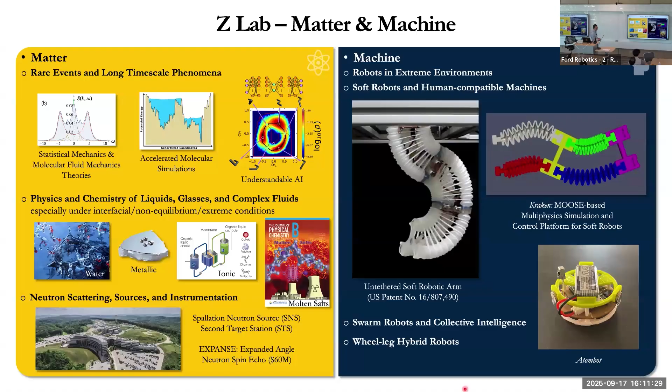So there are a lot of applications for robots in the nuclear field. Let me talk about how we got into robotics first, and then I'll look back to nuclear applications. Robotics itself is not a new concept; we have known robots for more than several tens of years, maybe hundreds of years.

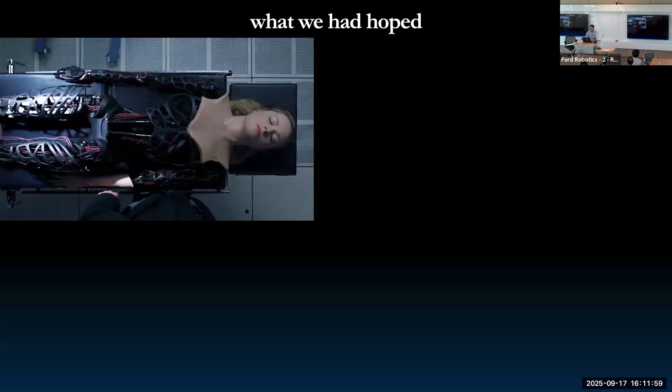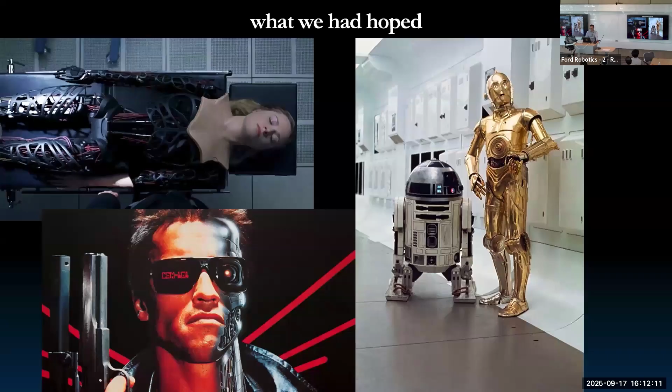At the beginning, what we had hoped for were general purpose androids, sometimes even more human than us, and maybe some crazy robot that tries to kill us, and sometimes an obedient robot that can always help us do different things, and lastly, maybe a cute, harmless buddy. But we've been spending so much effort on robots, and we don't have any of these.

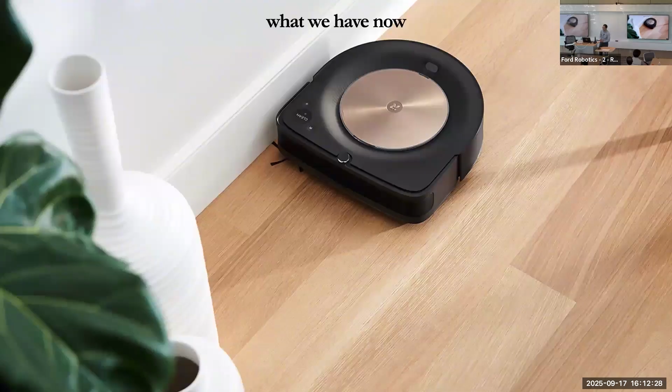The most useful everyday robot we have is probably this, right? So there's still a lot of work to be done before we can have the robots as we dream about. And that's why we still have a lot of people working on robots.

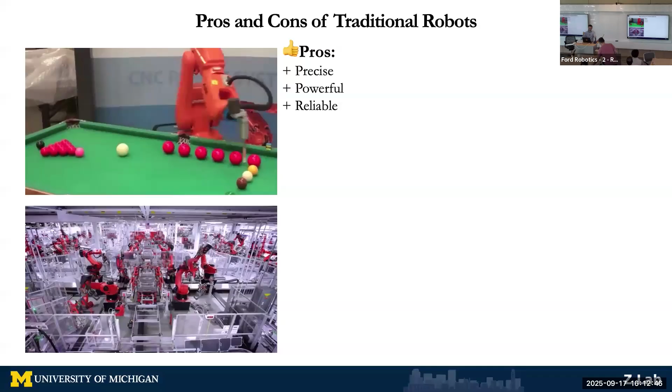If you reflect a little bit on the pros and cons of traditional robots, roughly summarized here: traditional robots are very precise, very powerful, reliable, and they don't complain, right? So, ideal student.

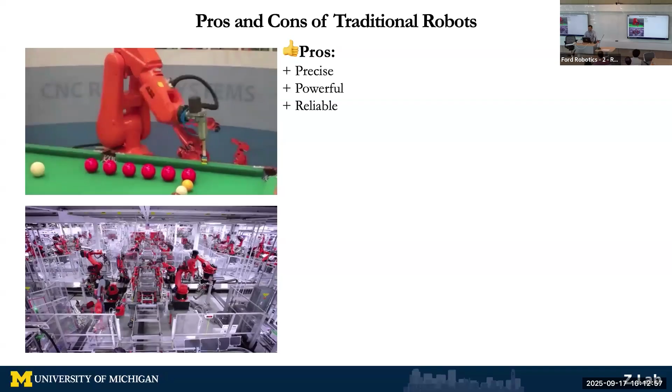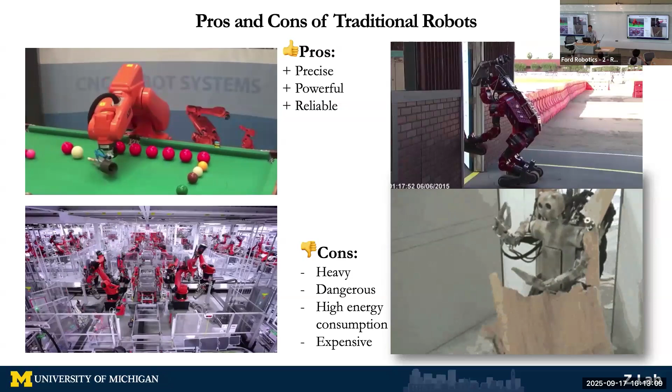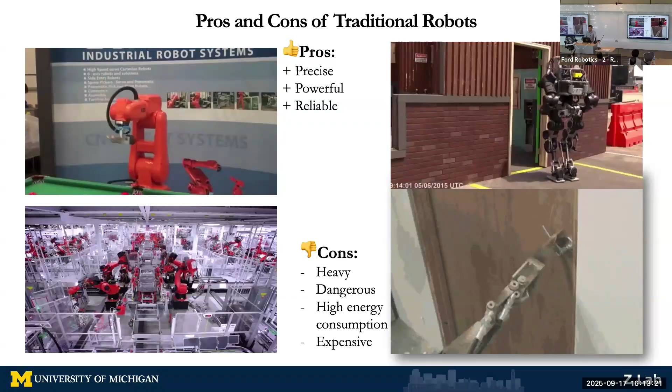But on the other hand, traditional robots also have a lot of problems. They are usually made of metal, very heavy, and they consume a lot of energy, and they're very expensive. In addition, when they fail, they fail catastrophically. That's why oftentimes we don't see robots around us, and more powerful robots are kept in cages, so they're not human compatible.

One of the goals -- I started working on robots again roughly 5-6 years ago, after I got tenure. After getting tenure I wanted to work on something different. And the one goal we had was we wanted to free these robots from the cages.

At that time, soft robots were a really, really hot topic. There was a lot of development in soft robots, the community was forming, with a lot of cool ideas. Soft robots became a mature field, a mature community roughly about 10 years ago. So we started to work on soft robots, trying to explore different new soft materials in our lab.

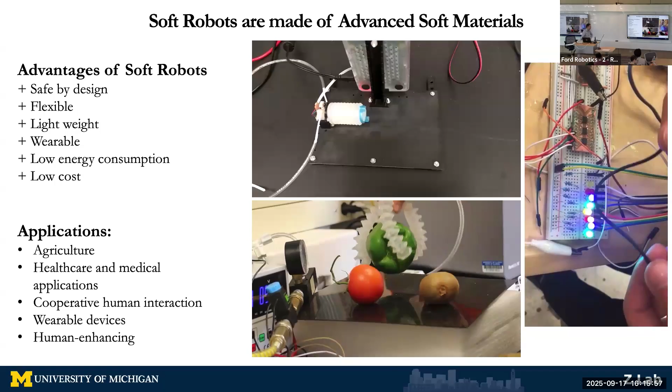So we spent some time on that, and in the nuclear field, we're trying to think about: can we bring soft robots to nuclear applications? Are there any unique use cases?

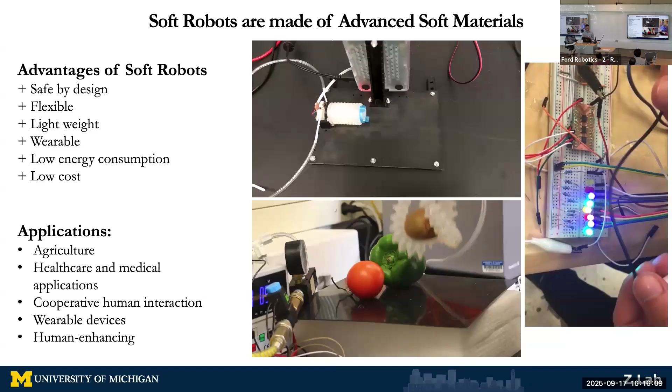So this is one of the early prototypes we built, starting from one actuator. We built multiple of them, then modularized the design into 3 sections that can be controlled separately. You can see the 3 modules already achieving degrees of freedom impossible for traditional robots.

So this looks very similar to a lot of the ongoing work in the field. By the way, this is the real-time movie. I think our robots move pretty fast.

The particular innovation we did is—it's not like we wanted this from the beginning. We wanted to find tiny valves that could open and close the air tube, but we couldn't find anything as small as we needed. So we use a soft tube. There are a lot of other slides, but I'm not going to show them today.

Our idea is that it's kind of like our blood line—if you pinch a soft tube, you can regulate the flow. So we use a micromagnet that drives a small pin, changing the pressure on the soft tube, which allows us to regulate the airflow. We can also completely close the valve, and the response time is in the millisecond time scale, allowing us to move really fast.

We filed the patent a few years ago, and it's already approved. Because our airflows are regulated locally, compared to other soft robots, ours do not need that many tubes. Otherwise, for every valve you'd need 2 tubes—1 input, 1 outlet. For us, even for the entire robot, we only have 1 tube. This way, the robot itself can be made more flexible, and we can also extend that even longer.

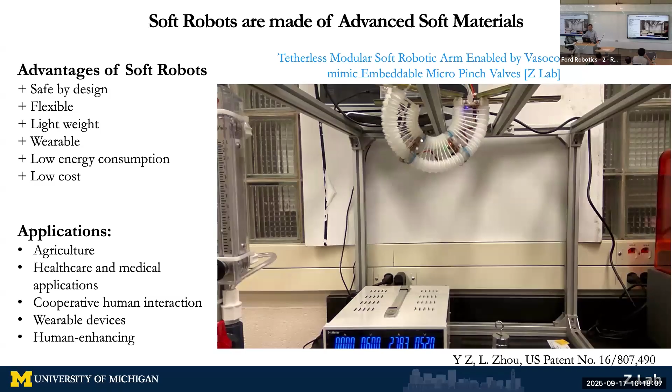Okay, I'm going to pause here slightly and change the topic to nuclear. So what is the hard problem we must solve? There are many hard problems nowadays we're facing, and this is a hard problem—not one we want to solve, but one we must solve. What I mean by that is energy.

This is a chart that shows global energy consumption as a function of time, separated into different categories. For a very long time, before 1900, humans really did not consume much energy. This really takes off from roughly 1900 to 1950. After 1950, because of the advancement of modern technology, human energy consumption really took off, and even more so in the last few years.

If you look at the different types of energy sources, we're still burning some traditional biomass. A lot of it comes from fossil fuels—coal, oil, natural gas. And there is more and more development in new energy sources, nuclear being one of them.

So in short, there's going to be more and more demand in terms of energy. The question is, how do we solve that? Well, we can keep increasing the mining of coal, oil, and natural gas—probably they're going to continue.

Of course, they are not perfect, not only because of environmental pollution, but even worse, they are very valuable resources. If we burn them, we cannot regenerate them for a very long time. We don't want our future generation, 100 years later, finding new uses for oil and saying 'our idiot ancestors burned all of them.' So even though we can keep using them, it's better if we can find alternative energy sources. Nuclear is one of them.

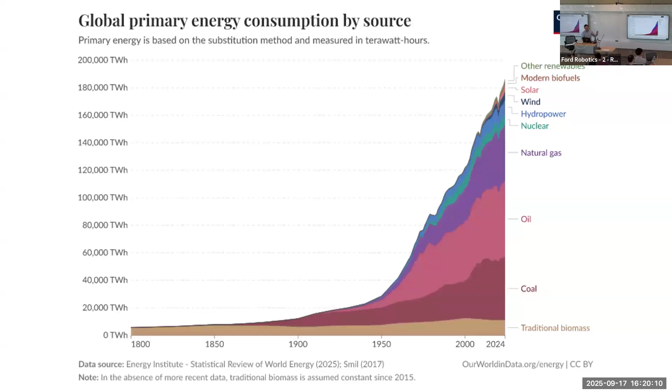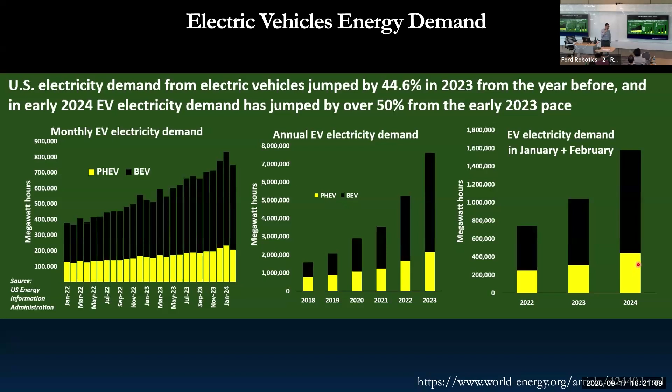If you look by month, in 2024 this paper doesn't have the data, but they compare the demand for the first 2 months of 2022 and 2023, and it's still growing faster and faster. If you look at the comparison of EV energy demands, now it's a big piece of the big pie.

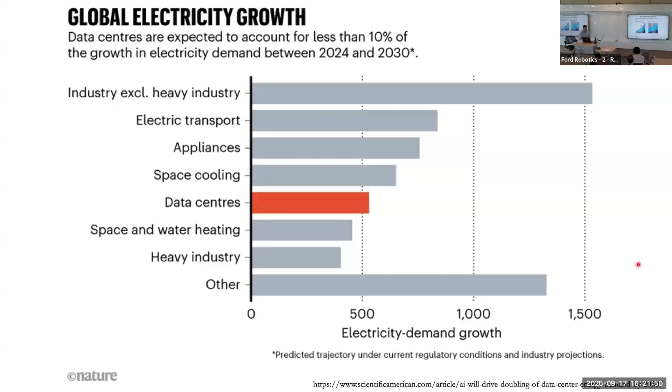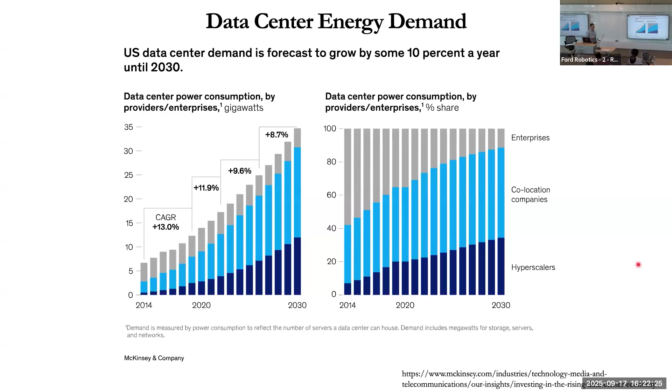So where does that energy come from? We still need to produce electricity to power what data centers need. That's why all of a sudden, a lot of billionaires, venture capitalists and high-tech companies start to put in a ton of money in terms of nuclear energy.

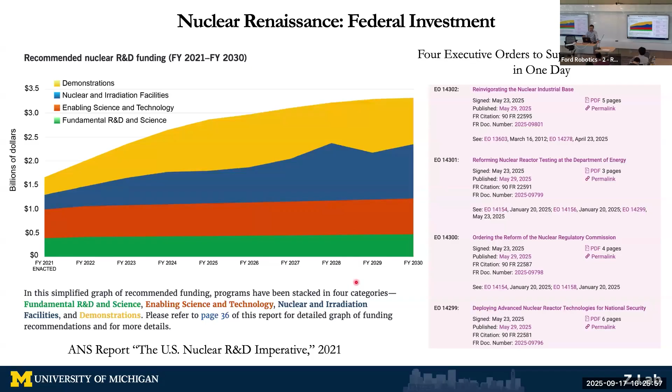So this is the big problem we're trying to solve. Now, coming back, what role can robotics play in this nuclear renaissance? In the past, we have been building soft robots, and I'm going to show you some use cases of soft robots in nuclear environments.

When we started to work on soft robots, they're not like traditional robots. You really have to make a 3D model, build a robot, then collect the data and test them. There's not a lot, almost none, of simulation and control environment. So we started working on that.

The first work we did is related to modeling and simulating soft robots. You can use some analytical models, like Cosserat rod or curvature models. They are very efficient for computing, but have very limited expressivity, usually assuming the robot is one-dimensional. Overall, it's very helpful to understand the motion of the robot, but they lack the details to compare with real robots. A more realistic method is to use finite element analysis.

Finite element is accurate, and you can also incorporate not only the deformation of materials, but also all the other physics—bring heat transfer, bring fluid mechanics. So there are multi-physics, but the problem with finite element is they are very expensive. You have to spend a lot of CPU power to do the calculation.

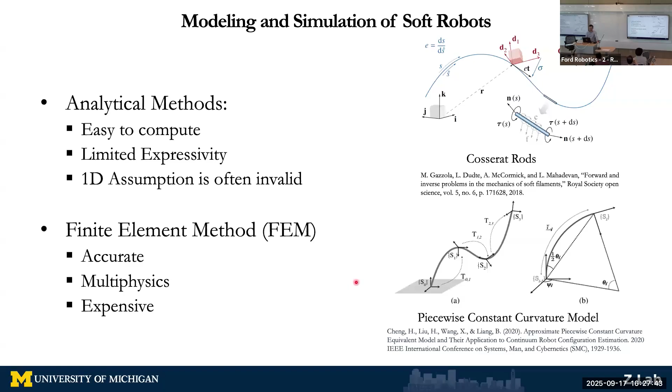So one research direction of my former student, Kevin, was to develop simulation environment software for soft robots. So we created a simulation environment we called Kraken, built upon a MOOSE framework.

For those in the nuclear field, you may have heard of MOOSE. It's a large-scale finite element framework, provided by many different components of packages supported by DOE, the Department of Energy. Originally, MOOSE was created to simulate nuclear reactor fuel performance, etc.

On top of the MOOSE framework, you can build apps. It's open source, and by design supports multi-physics, providing high accuracy modeling. But it's not designed to simulate soft robots.

So we took the MOOSE framework and built an app on top of it, which we call Kraken. In particular, we added three features.

MOOSE, from the nuclear field, does not usually have hyperelastic materials. So first, we added a capability to simulate hyperelastic materials. Then we added the capability to simulate the dynamics or kinetics of the soft material. And lastly, we had to deal with self-contact—without self-contact, the soft actuator wouldn't bend. So these are the three features we implemented.

I'll go through them quickly. The first one is hyperelastic modeling. Usually there are a couple of other simulation frameworks for robotics in the field, but most of them treat the material as linear, so they don't really directly have hyperelastic materials.

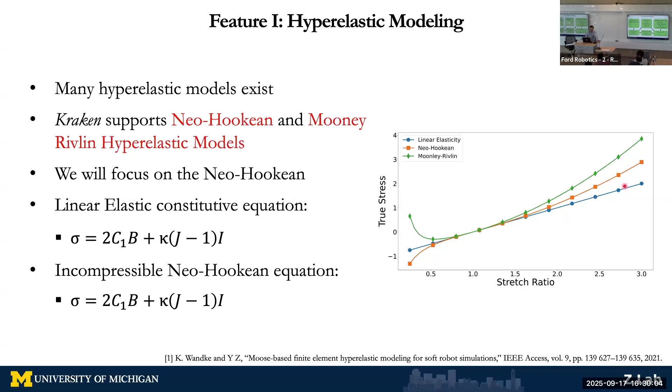That's only correct when you don't have large deformation. In a linear regime, the linear approximation is good, but when you go to very large deformation, we have to use the hyperelastic model. This shows the stress-strain curve of these soft materials—linear elasticity is here, but the actual deformation follows either the green or the orange curve, for different materials. So we implemented this hyperelastic material simulation in the framework.

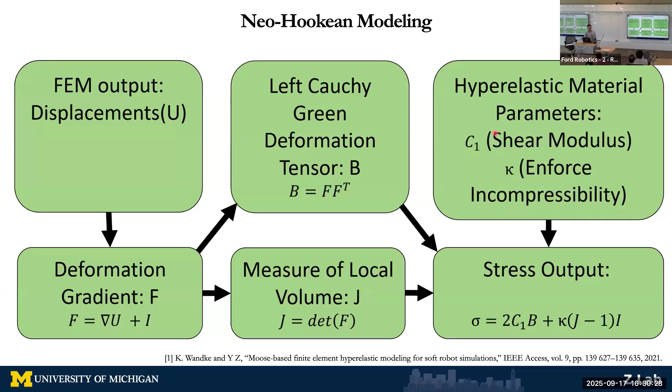Here are more details on how we do that. In order to calculate the stress-strain curve, we first deform the material and calculate the deformation. From there, we can compute two quantities: one is the so-called left Cauchy-Green deformation tensor, the second is the local volume. Based on these two, and also some material properties, we can calculate the true stress of the material.

This is some demonstration of our simulation. We start by stretching a rod, a hyperelastic rod. If you only stretch it a little bit, it's elastic. If you keep stretching, the hyperelasticity starts to show up.

In this figure, we show two lines on this curve. One of them is our simulated Neo-Hookean model, the other is the theoretical stress, and they agree with each other. For linear elasticity, you can only go to about 100% deformation.

Then we built an actuator, a very simple one that everyone uses. We built the actuator, and we can also stress it and get a stress-strain curve, and this has a somewhat good result compared to the experimental method.

So we built the actuator and inferred the material property. By the end of the day, you can see the smoother curve is our calculation, and this rougher one is the experiment. So we can model this hyperelasticity in the soft robot.

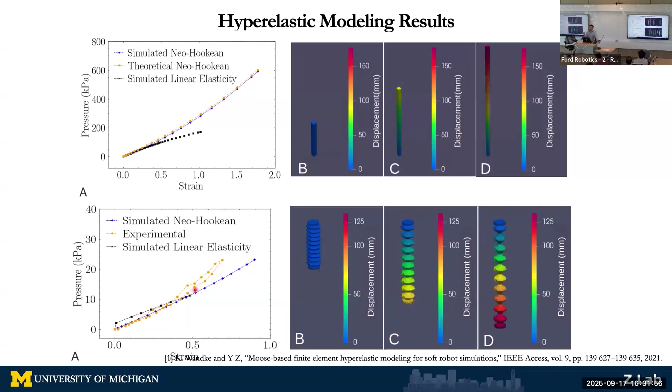The second problem we faced is that because the soft robot itself is soft, oftentimes when you move the robot, it's not very stable—it's often underactuated, oscillating. So only being able to simulate or understand the quasi-static configuration is not enough. We need to be able to simulate the dynamics of the soft robot.

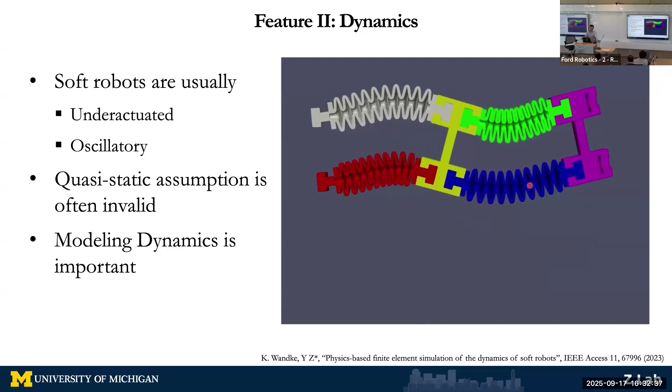So within our environment, Kraken, we added the capability to model the dynamics. This is a demonstration to show that we can simulate the deformations of a two-dimensional robot arm. Later on we have a real one, but this helps us both control the robot and iterate the design process.

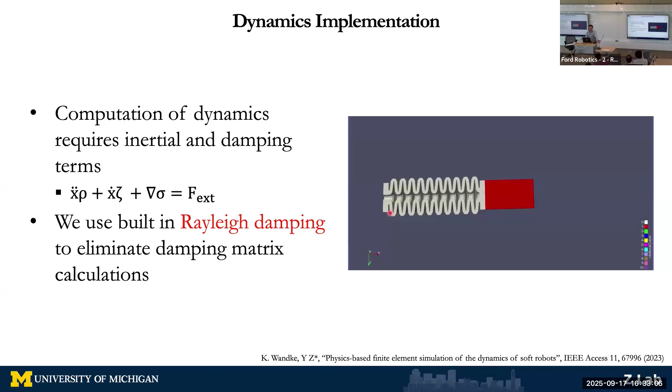This is another demonstration to compute the dynamics. The time scale is not linear, that's why it's not very smooth—we accelerate the simulation so we don't need to sample unnecessary time steps. In this comparison, we show that we can model the Rayleigh damping of a hyperelastic actuator.

Sometimes we really want to push to the extreme to see if we can simulate more complicated motions. So we took one actuator, again a very simple one, with hyperelastic deformation, and we put a weight at the bottom.

Even with this, the system itself is nonlinear. This hyperelastic pendulum can swing, and at the same time the actuator can also expand and contract. So there's a lot more computation involved, and this is a complex system. We really cannot have exact predictions for a long time, but for a short time, that's pretty good.

The left-hand side shows the actual measurement of the locations of this actuator. The right-hand side shows the simulation. The actual trajectory itself is irrelevant. What's important to look at is the spectrum—the prediction of our simulation matches the experiment pretty well.

So this opens a way to not only simulate the static configuration of a soft robot, but also the dynamics. It's very important for soft robots.

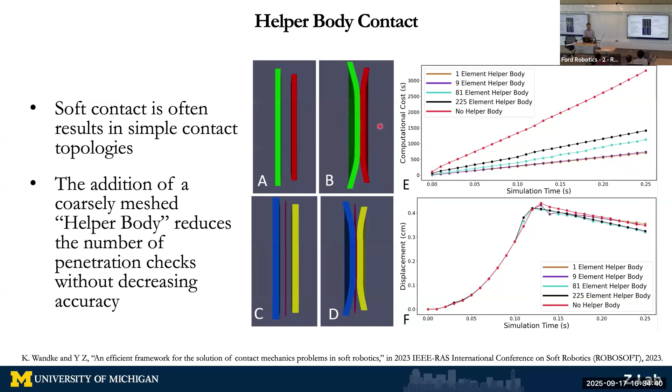The third feature we had to implement in order to simulate soft robots is contact. A soft robot can move because of contact. The original Moose framework does not have soft contact, and computing contact mechanics is usually very expensive. So we found a smarter way: we add a helper body to separate the two different components, which helps speed up the calculations of soft contact mechanics.

So now we're able to simulate all of this on the computer, which can help us with both the design and the control of the robot.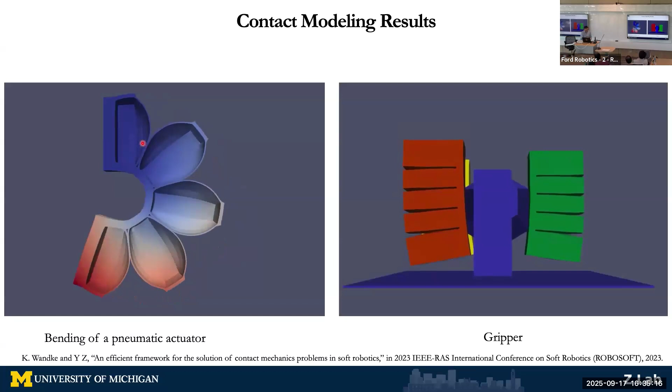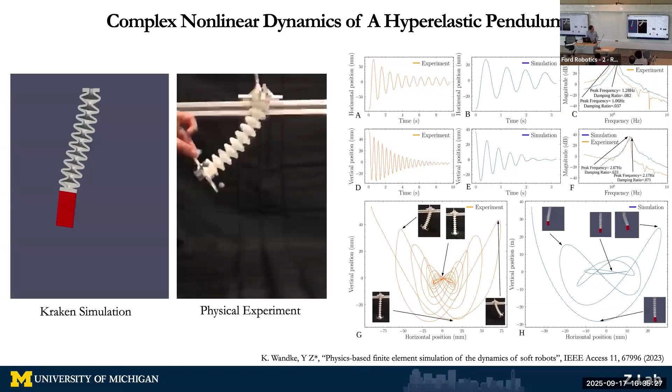Undoubtedly, when we published this work, we were contacted by a company. So let me explain why I have a simulation like this—what is the shape? This company makes prosthetics, artificial hips. They reached out to us because one of the major costs of their product is actually making the package.

You have to package the hip in a form, so they wanted to know if we deform the hip, try to make it flat, can we predict what its shape looks like. It's a pretty simple calculation for us—we did it for them. This is the artificial hip.

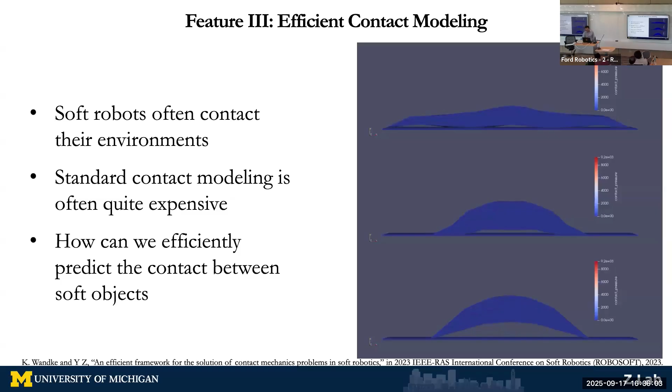So in short, this part of the work was really done by one of my students, Kevin Wandke. I did the three components of this framework—we have a simulation package called Kraken. This allows us to simulate hyperelastic material deformation, the dynamics, and also some efficient soft contact.

With this, we can really help speed up the manufacture of soft robots.

Now I'm trying to connect this. You see the in-air version of the soft robot arm—it moves pretty fast, but it wobbles. One challenge for soft robots is that they have to handle the weight of themselves. The only pure soft animals in the world are underwater, like the octopus.

So we decided to redesign our soft robot arm and put it underwater. This is also because of nuclear reactors—we have a reactor pool, and we need a robot arm that can resist radiation and also operate underwater.

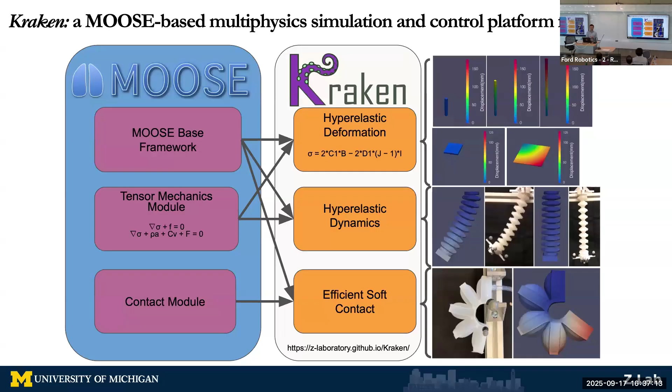So we did it—this shows it doing some crazy movements. We haven't seen that yet on the video. The size of the arm is basically the size of my arm, not extended—a brief idea similar to our previous design.

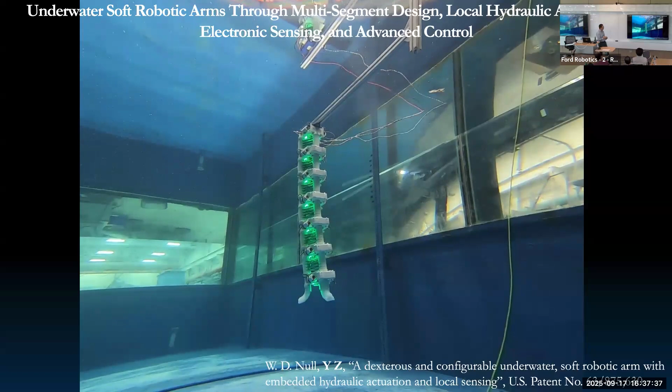In this case, we're in the underwater environment. If you watch carefully, you might be able to see water flows.

With the multi-physics simulation package, we can simulate the deformation even underwater. We can simulate fluid mechanics within the actuator as well as deformation of the hyperelastic material.

And I have an accelerated version—acceleration—you can see the flexibility we can achieve in an underwater environment.

So again, we filed another patent. Another benefit of a soft robot like that, especially underwater, is we can tune the density of the robot to be very close to the density of water, so they are neutrally buoyant. We don't have to worry about the weight of the robot itself.

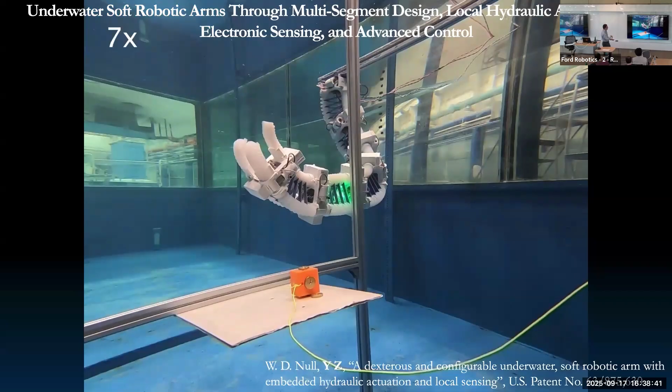And being flexible, you can use the robot arm to go around obstacles to grab things. So we put a pillar in front of the robot, but because of the flexibility of the robot, we can use it to grab something behind the obstacle. This is oftentimes very much needed in a nuclear reactor pool.

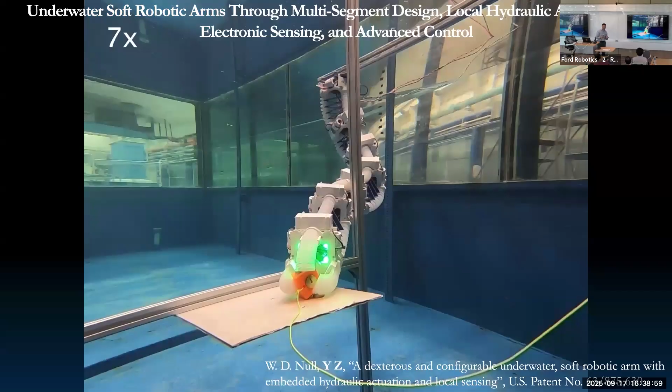So although you might think that you really do not want to drop anything in the reactor pool, in reality, a lot of them get dropped in the nuclear reactor pool. And it's very, very expensive to remove them.

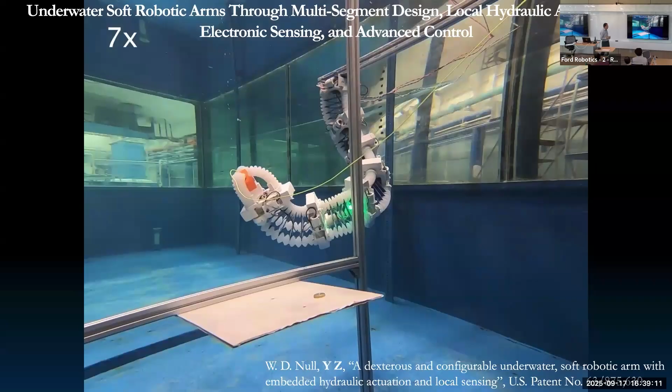For our soft robots, because we pump water from the environment, nothing is 100% radiation resistant. Everything will fail eventually. But our robots are somewhat more radiation resistant than traditional robots because we make them from soft material. Soft material becomes harder and harder under radiation. Eventually, they are going to fail, but when they fail, we replace them. This can be modular. Every section is cheap and replaceable. So this is the benefit of having soft robots instead of traditional robots.

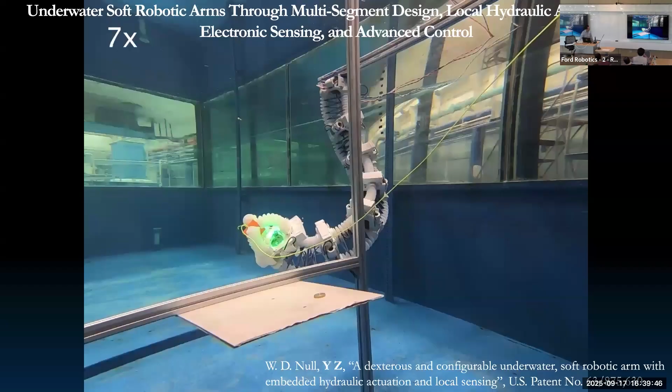There are a lot more applications in this environment. So if this seems familiar, you might have seen that in Spider-Man, right? The design of the robot arm is very similar to Dr. Octopus. I watched the movie a long time ago, and I feel like no real person can carry those metal arms. So what we are trying to do in our group is build a soft Dr. Octopus.

Interestingly, do you still remember why Dr. Octopus created those arms in the first place? Nuclear, right? Dr. Oct needs to achieve nuclear fusion, so he needs these arms to put in deuterium and tritium together to ignite the fusion process. So yeah, Dr. Oct is indeed a nuclear scientist who created the robot.

There's a lot more behind the scenes which I'm not going to be able to show. But in this video, we show trajectories of the robot as it tries to reach a few different targets using different controllers, as shown in our paper. The robot itself is very challenging. The open-loop inverse kinematics, visual servo, CQL, and TRPO controllers are benchmarks, and the auto MPC controller is shown in comparison to them. The panel on the bottom left shows real-time details of the experiment, such as time outside the goal region and current distance between the end effector and the target.

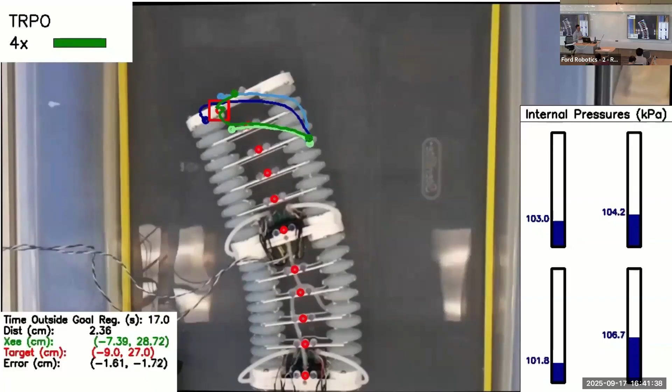The panel on the bottom right shows pressure readings in each of the corresponding hydraulic actuators. In each of the selected experiments, the auto MPC controller is shown to outperform the benchmarks in terms of final distance to target and time outside the goal region.

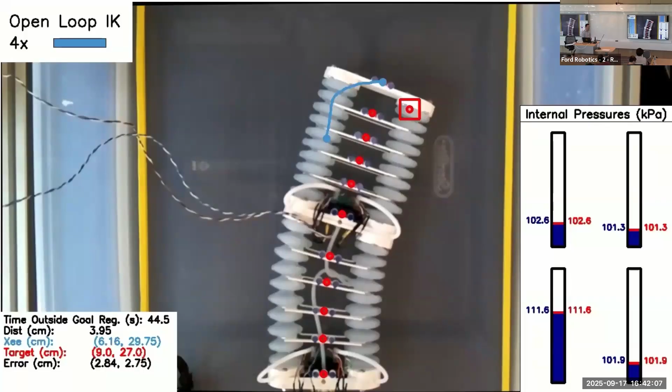This work we collaborated on with my former colleague Chris, who developed this automatic MPC method, model predictive control that can automatically tune the hyperparameters. We show that with auto MPC, at least for the simple robot, we can achieve better performance than the traditional controller. I don't think I'm going to finish all the movie, but if you want details, you can take a look at the paper. It was published in RAL a couple years ago, 2023, presented at IROS.

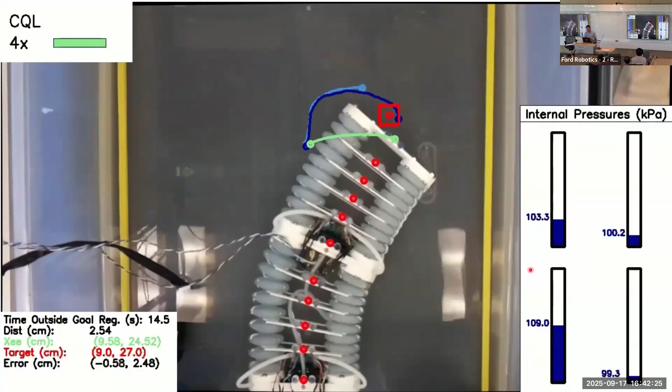So moving forward, there's still a lot of work to be done in the field of soft robots, and I'll be reflecting on what are the technical challenges. David and I have been writing this paper, and it's being reviewed now. We gather a perspective article trying to put all the challenges that prevent us from building practical soft robots into 4 different categories: material challenges, energy or battery challenges, sensors, and computing, including control. Hope this paper will be released soon.

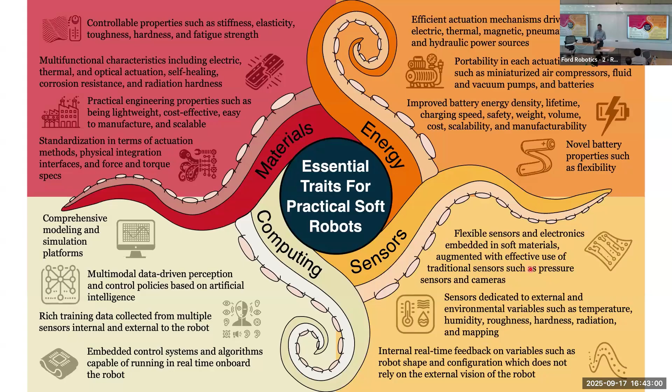A lot of our previous efforts have been devoted to soft robots, and we're still interested in that. After moving to Michigan, I tried to expand to 2 new directions. One of them is swarm robots, the other wheel-like robots. I'll mention a little bit for the remaining time.

Swarm robot is a collection of many robot systems, and they're also motivated by movies. Here I show you the cookie bot in Big Hero 6. In fact, this is exactly the one we are making in our lab right now. Probably have watched too many movies. Then the other one is the even smaller one, the microbot in Big Hero 6. Our robot is more like this cookie bot.

So the idea is that even with one simple robot that has a very limited function, if you have a large amount of them, collectively they can show some higher level intelligence. They can accomplish tasks that are impossible for traditional robots. And these robots are also cheap, otherwise we cannot make hundreds of thousands of them. Just like an ant, if one or two ants die, it doesn't affect the entire swarm. So we wanted to make a robot there. There has been a lot of work done in this field, and we try to build upon what other people have done to get more control of individual cookie bots.

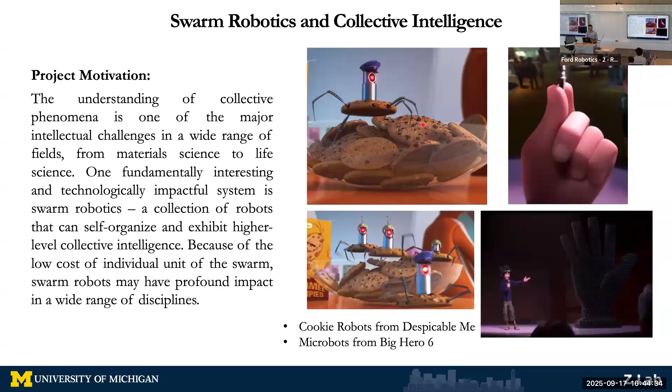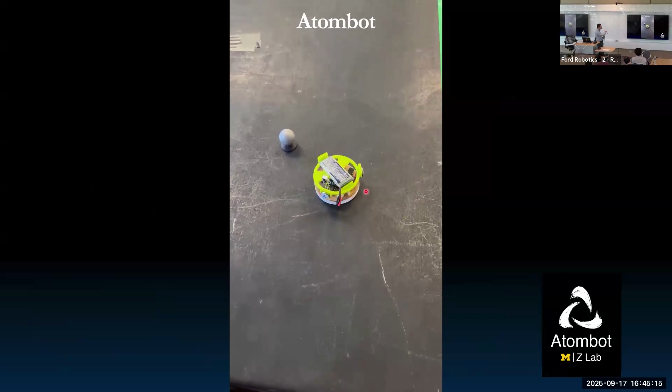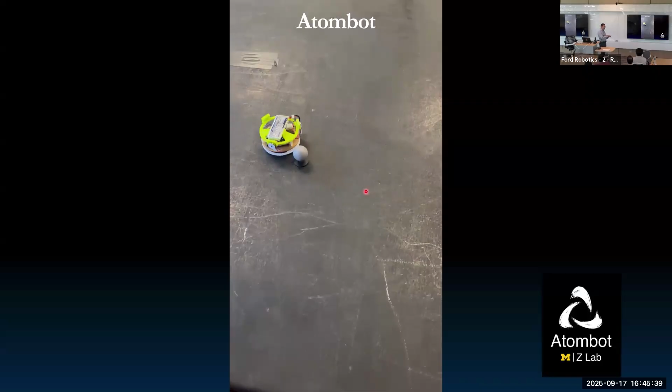This is a small movie of one of the early versions we made. It's vibrator-based, kind of like Hexbug—based on vibrators, with added control so you can control how they move. They're still very cheap; we don't use wheels because we want to maintain the low cost of the robot, and they're very low profile. In the future, clients can put sensors on top so they can go underneath the table, like the cockroach bot, and be used for information collection, surveillance, etc.

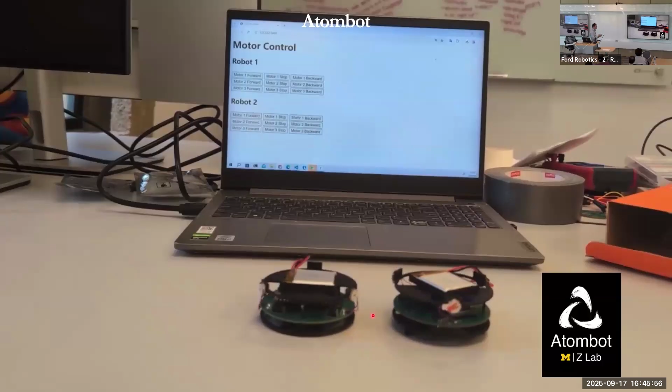Another movie shows the version we had last year. We were able to improve the design and have multiple of them communicate with the central server. We're still making more iterations to improve this—this is one research direction we're exploring right now. I'm fortunate to have a student with strong interest who is working very hard on this. I hope in a couple of years this research field will really grow.

The second robot—I don't have a cool movie to show—is a wheel-legged robot, kind of like a Boston Dynamics Spot but with wheels. They're motivated by a lot of movies. We're working hard to build this wheel-legged system similar to the Unitree robot. When we started working on that last year, Unitree hadn't really announced theirs yet. Anyway, that's the second system we are building.

Okay, I'll try to wrap up before 4 o'clock. In short, there are a lot of applications of different robots in the nuclear field. I want to show you two pieces of information that might be relevant to many of you.

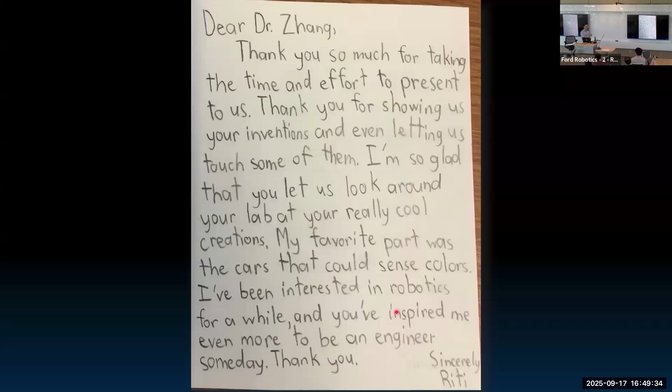From time to time I have dark days as well, and every time I see this, it brightens things up—this is the light behind it all. I'll stop here and end with a quote from Laozi: 'The soft defeats the hard, and the yielding conquers the strong.' There are a lot of applications of soft robots in very, very hard environments. I'll stop here—happy to answer any questions you have.